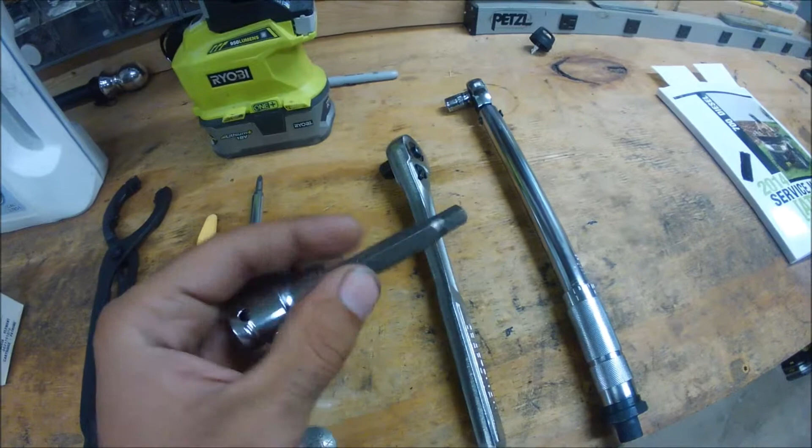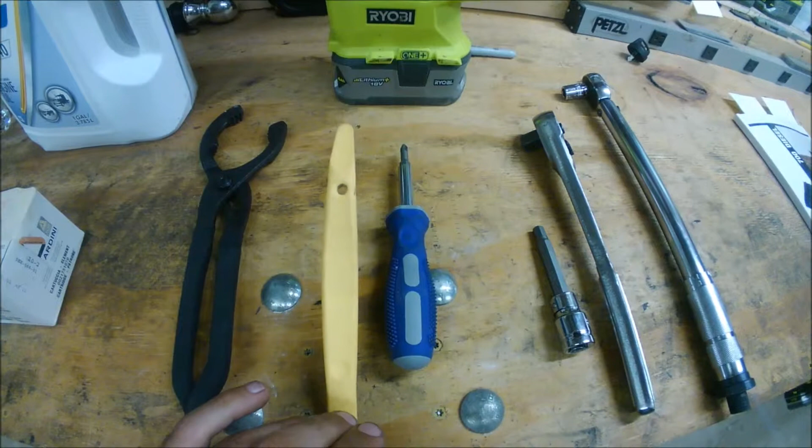Tools I got laid out: a socket, I'm going to be using 8mm, an Allen key - if you don't have the socket type, a regular one would be fine. That's going to be for the oil drain. I got this out because it gives an 18 foot-pounds torque spec for that plug. Just a screwdriver and a little prying piece for taking off the engine side panel, a filter wrench, and then my light if I need it.

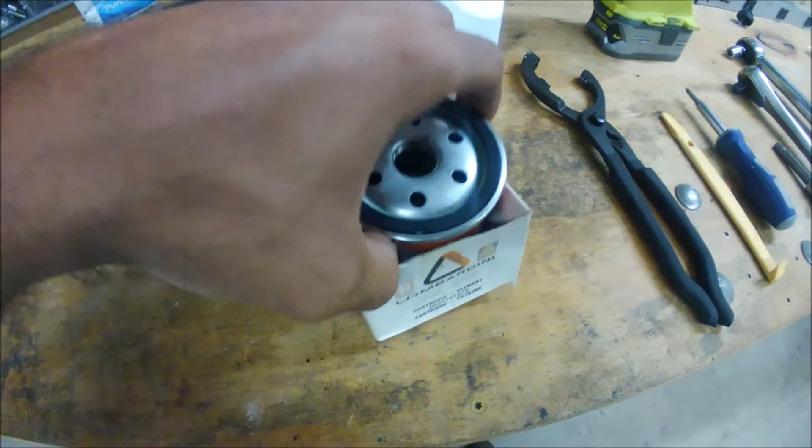Oil filter - this is the one that you'd get if you went to an Arctic Cat dealer. Lombardini part number 3206-194. I bought these as overstock from an Arctic Cat dealer that closed. I already took it out of the plastic - it comes with the plastic.

Gaskets on there, and I'm going to use Rotella 15 weight 40. The manual recommends a 10 weight 40, but I'm in South Texas, it's mostly warm, very warm, so I don't mind having a little bit heavier oil in there. Also, I buy this by the case - big cases for my tractor, my truck, now for the ATV, for my diesel generator, all that stuff. So keeping it simple. And water, so I could hydrate.

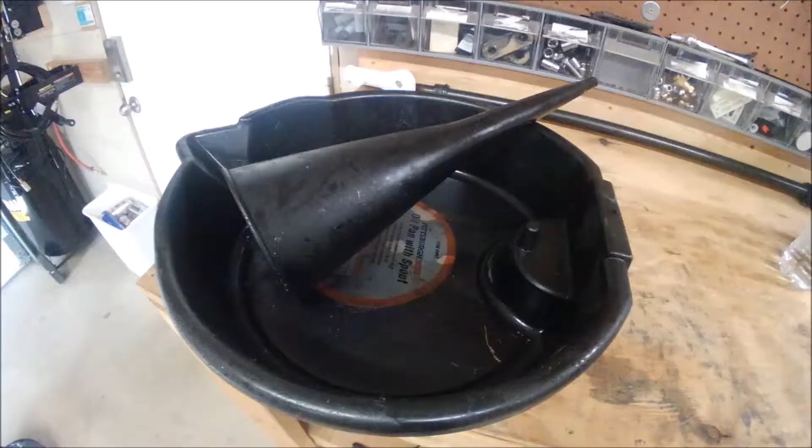Should go without saying, but you need a drain pan for your oil. And then I have this long funnel because, as you're about to see here in a little bit, the oil filler cap's kind of deep inside an access panel, so it'll help. Then I got a bunch of blue shop towels, paper towels, for cleaning up oil because you know it's going to spill.

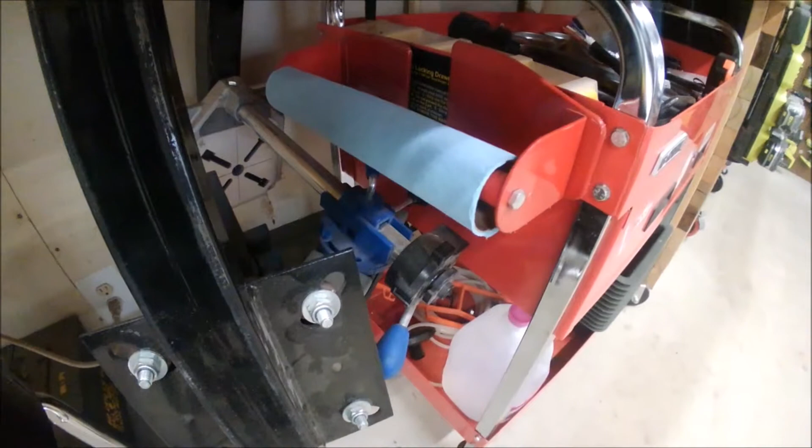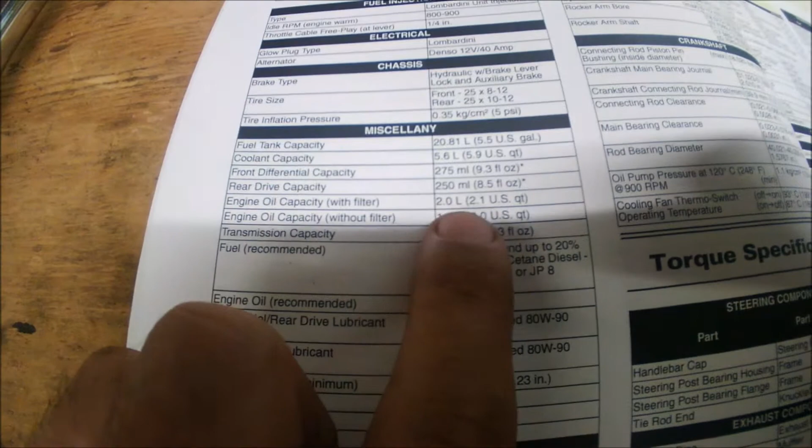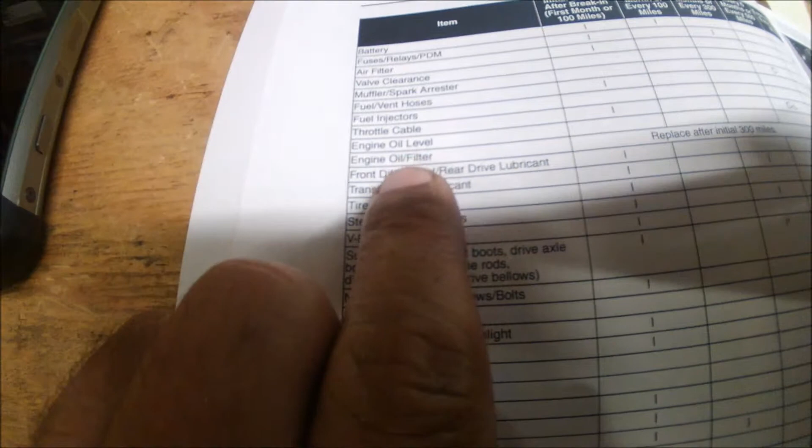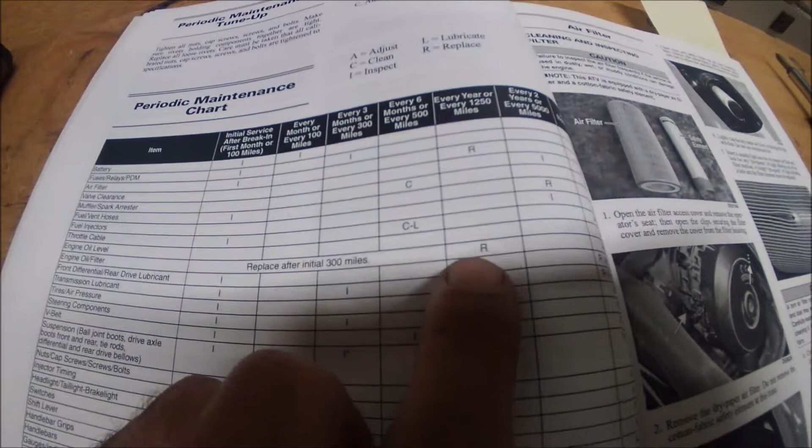Open up the service manual to page 2. Oil capacity with filter: 2.1 US quarts, or 2 liters. Recommended engine oil, like I said before, is a 10 weight 40. On page 6 of the manual is the periodic maintenance for your engine oil and filter. The initial 300 miles of the machine is like your break-in period, and then it's every year or 1,250 miles. Surprised they don't tell you about hours either, but I guess every year is fine.

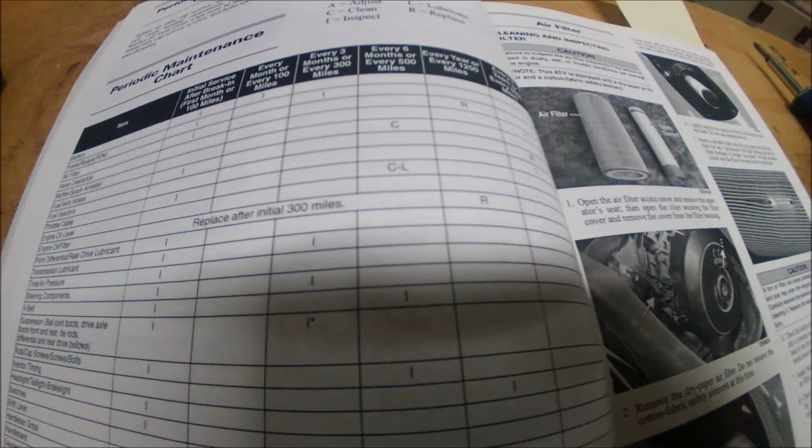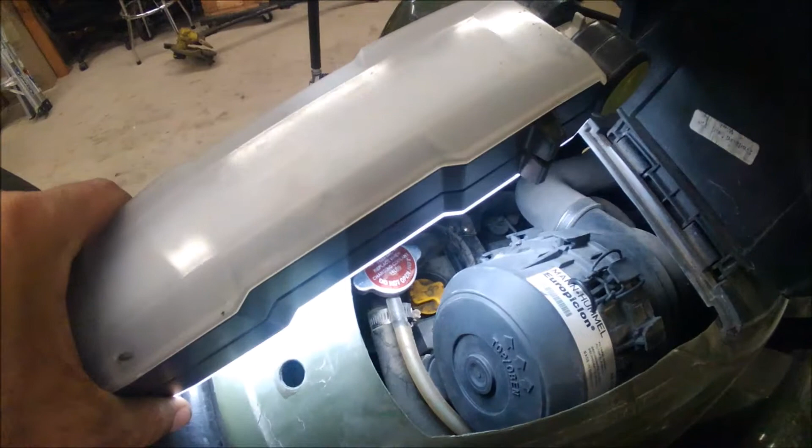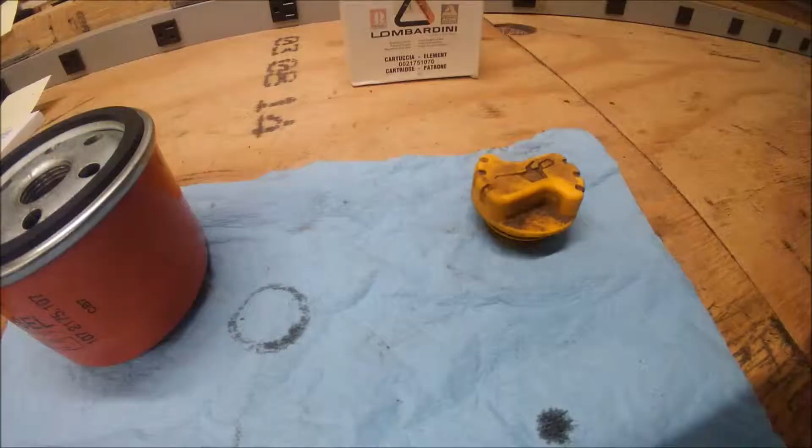First thing to do is open up the oil filler cap - it's the yellow one with the little oil symbol on it down there. Got the cap off. Should have mentioned earlier, but get it up to running temperature so the oil is thinned up a little bit and it'll drain out a little bit easier. I put the funnel in there just to remind me the cap's not on, and it's in place for when I need to put oil in.

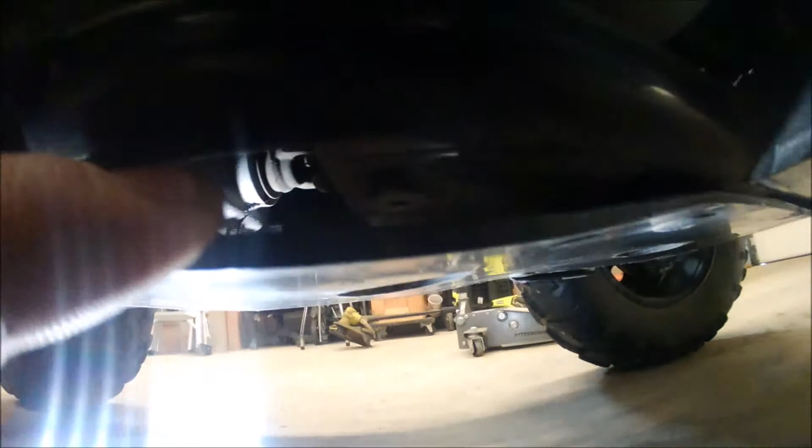Next to the oil drain plug, got my 8mm here on the ratchet. As you can see, I came on the right hand side of the machine. You look up and there's a little hole in the plastic here - you can see it, that's your oil drain. Alright, got my drain pan in place. If you're so inclined, use some gloves. I mean, I'm not wrenching every day, I don't really care about getting oil on myself.

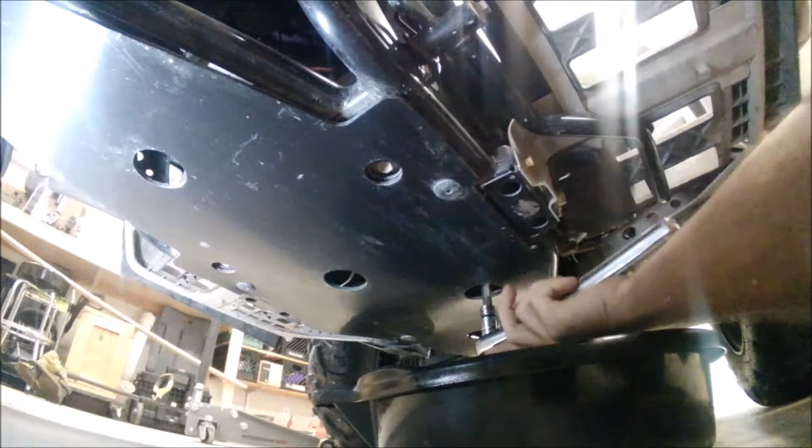Whew, it's still warm. She's draining out. Alright, that's going to keep dripping for a little while. As you can see on the drain plug, there's a little brass washer - don't lose it, don't damage it, or you'll have to get another one. That acts kind of as an extra gasket to prevent leaks and stuff.

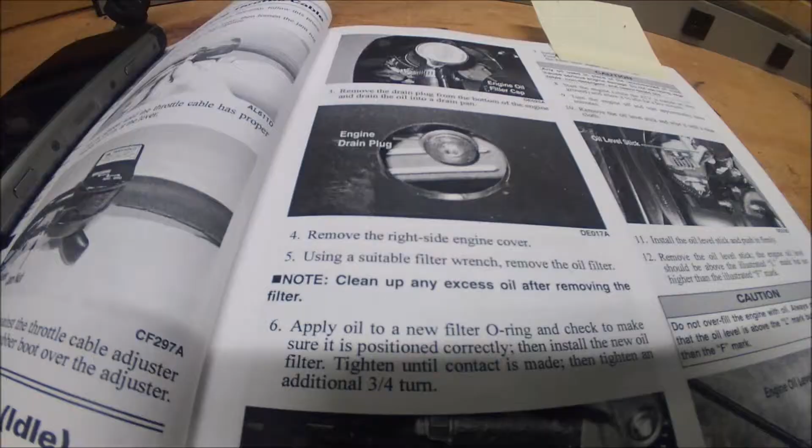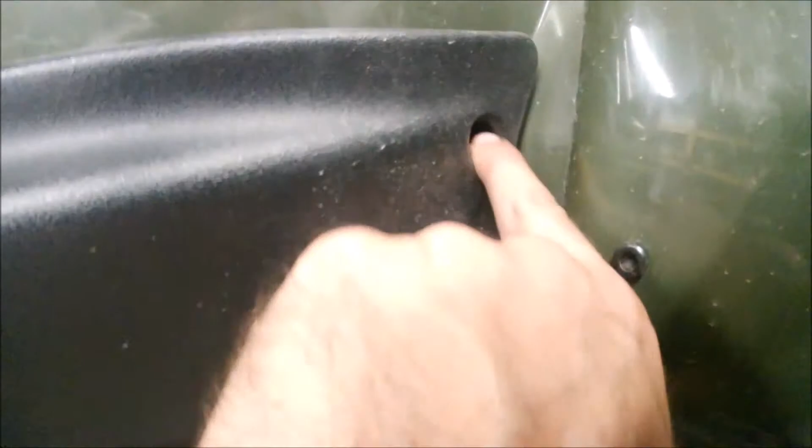To remove the right side engine cover - that's this cover right here. And it's got these weird, I can't even record them that well, but they're like weird body panel fasteners, like a Phillips screwdriver. And I'm gonna take the seat off.

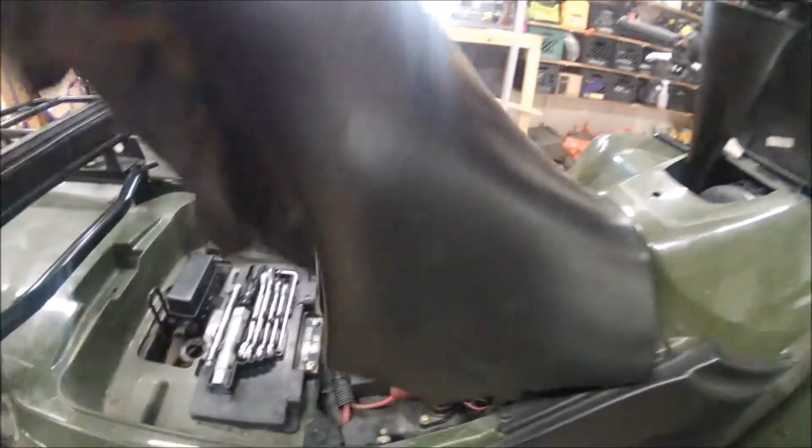Alright, these little things don't come off very easy. I've done this a few times before, putting in here. I don't know if I said you needed a screwdriver on my little tool list at the beginning, but I think it was laying in my line of tools. So if you end up damaging these, getting them out to the point where they can't really be used anymore, you can go to the auto parts store and find them in the help section.

Sometimes they won't thread out and you got to just sort of yank the panel off, like this one. Doesn't really seem like it wants to come out, so put the screwdriver and what came out down.

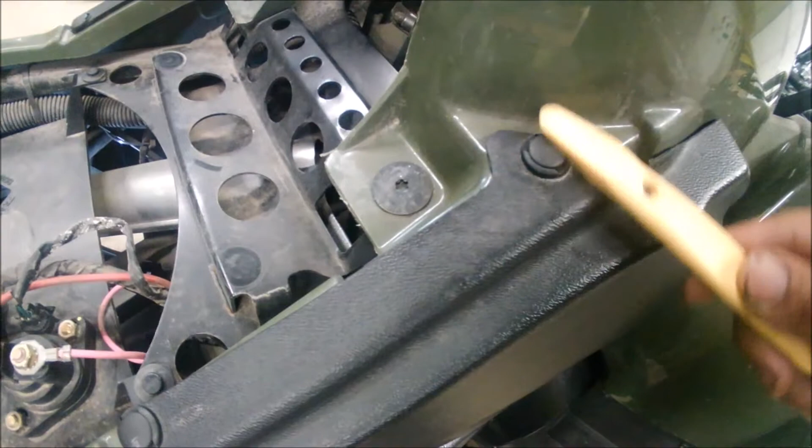Using a little pry tool. These are underneath too, little like pop rivets. Just get underneath and pull them out. Not supposed to come all the way out, but again, these are sort of like disposable things. So if you end up destroying them, go find an assortment of them at the auto parts store. I actually bought that one, came out pretty good. I bought a huge assortment of them for other stuff I do on my trucks and everything from eBay, where I find the piece here.

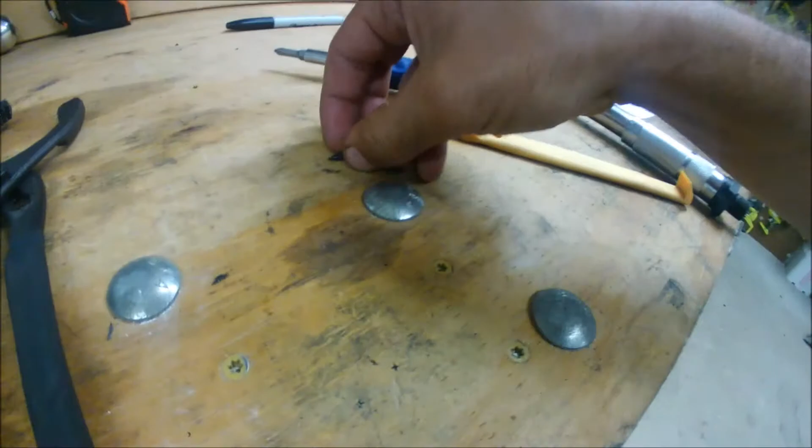Here's what I got out so far. See if I can do all this one-handed. See, that one was stubborn, didn't want to come out. Just yank it. The other one with the screw. Yeah, I'm just gonna put this over by the tire. Get the rest of my pieces here. And that white thing right there is your oil filter.

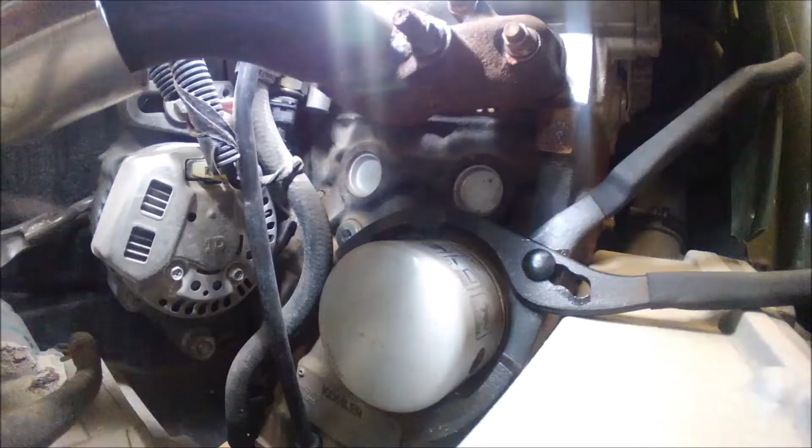All right, I don't have the best fit for the filter wrench, and I don't know how long this has been on here for, so I'm hoping it's not going to give me too much of a problem coming off, and kind of imagining this thing's going to make a god-awful mess, just going to drip all the way down. So I just moved the drain pan, and I'm going to hope for the best. Oh, it's moving. Cool.

Looks like there's a Wix filter, which O'Reilly's sells. Part number, I think, 557207. If you're smart, you'd find a way to cross-reference anyway. But there we go, a little more information.

Loose enough, get it off by hand here. Yeah, there goes the oil, dripping down.

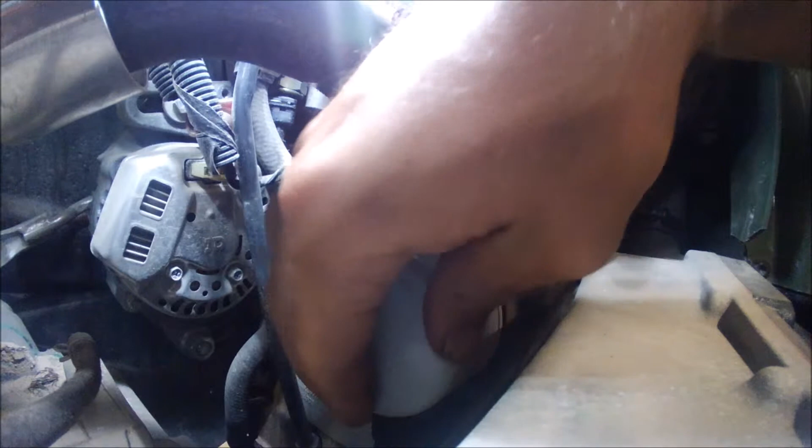Looks like most of the oil made its way down to the plastic skid pan, where at the beginning we showed the little access to the oil drain. So if your pan is still in that spot, it should catch most of it. Take my little shop towels, I'm gonna clean it up. Make sure the surface is in good shape. I'll do my best to clean up some of the oil, but it'll just burn off.

All right, I'm getting ready to put the new filter on. Normally when I do my truck and stuff, I'll fill the filter, but because this one's sideways, obviously all that's gonna pour out. So I opened up the oil here, and I'm going to put a good coat of it all the way around this gasket. I don't know how long it's been sitting on there. Hopefully it's good. All right.

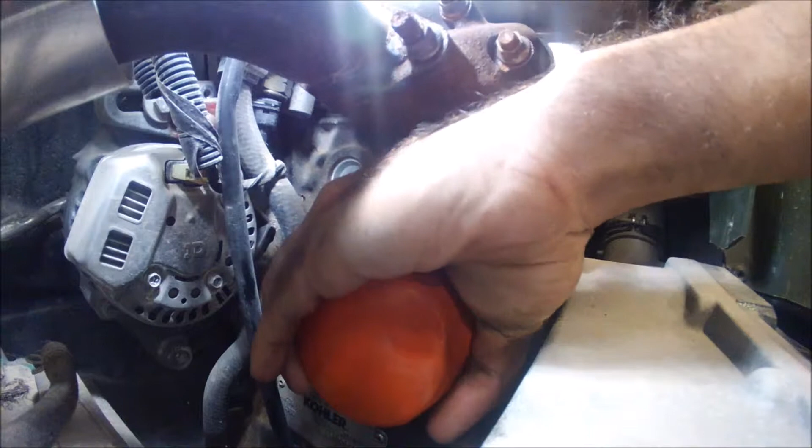All right, putting a new filter in. It says on the filter itself, hand tighten only, which is a little different than inside the book, which says until contact and then three-quarters of a turn. I don't know what the hell contact means, but I'll take this, and as tight as I can get it with my hands is where I'm going to leave it at.

All right, it's good to go.

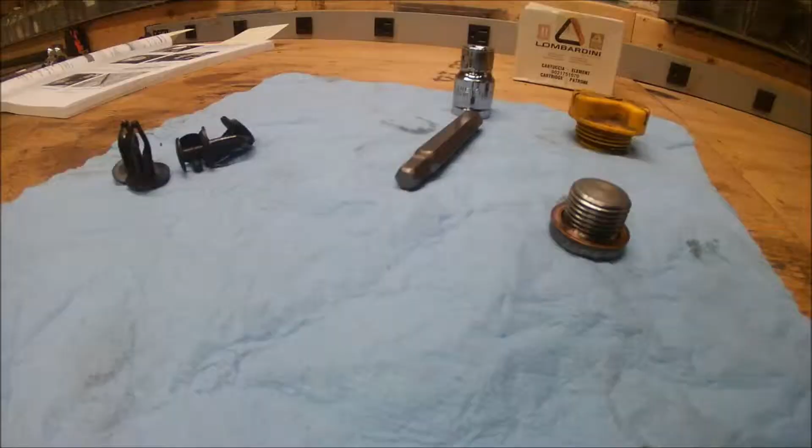Gotta put your drain plug back in now. I'm still gonna leave the drain pan there, even though it's a little bit in the way, just because all that oil that came down from the filter is still dripping. Kind of a pain in the ass, but I haven't found a vehicle yet where it's really good to go with when you take the filter off, not making a big old mess. But got my 8mm socket set back up and put it in there hand tight for now.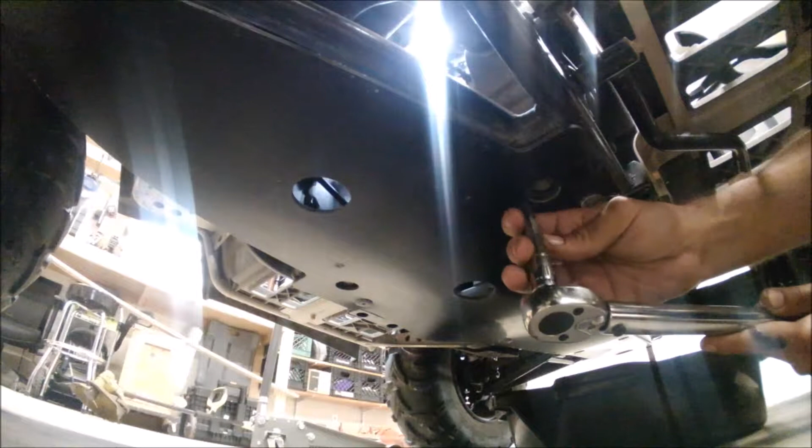18 inch-pounds, as you were, 18 foot-pounds. Got it tightened, and that is according to the manual.

Okay. Come on now, get that out of the way. Okay, cool. All right, I'm ready to put the oil back in.

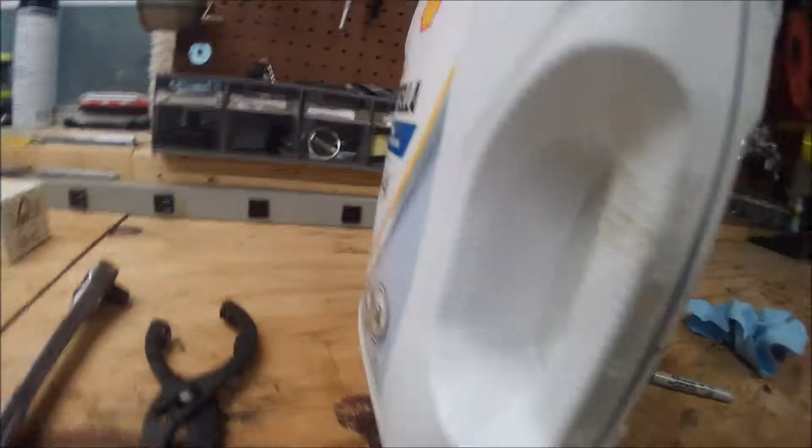It gave me over here. I marked it at 2 liters. So.

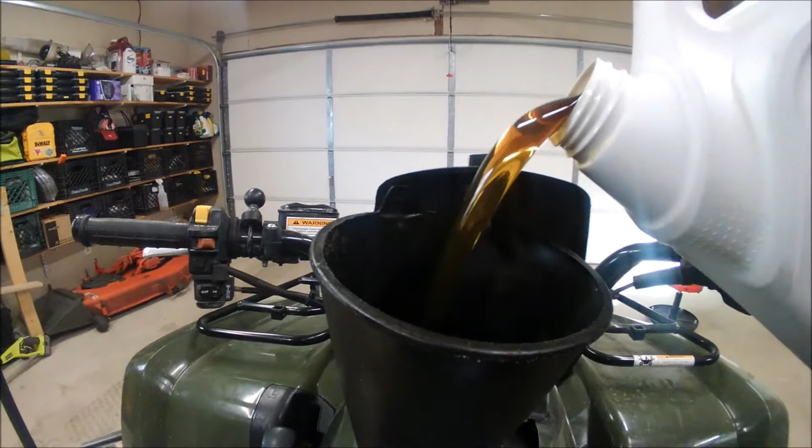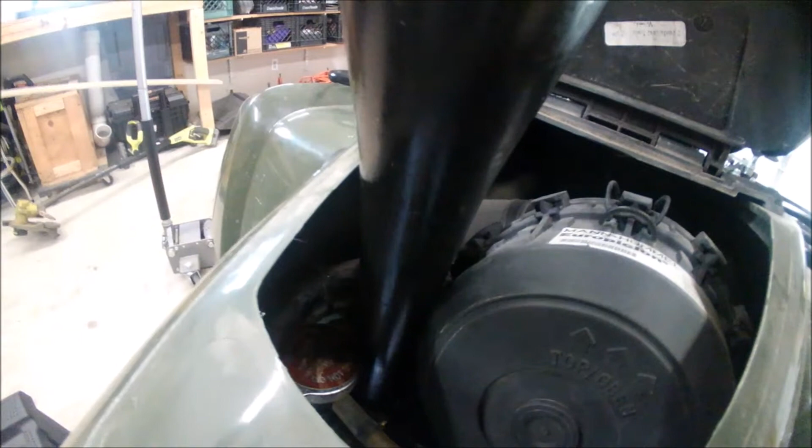Back on the table, see where we're at. Okay, a little bit more to go. You want to make sure you're not pouring it too fast in there, because just a little ways under where the filler cap is, sorry you can't see very well in there, the funnel isn't going very far, and this oil's thick and it's not warm, so I suppose it couldn't go down all the way and you end up spilling some of the oil out. So let's be conservative with that.

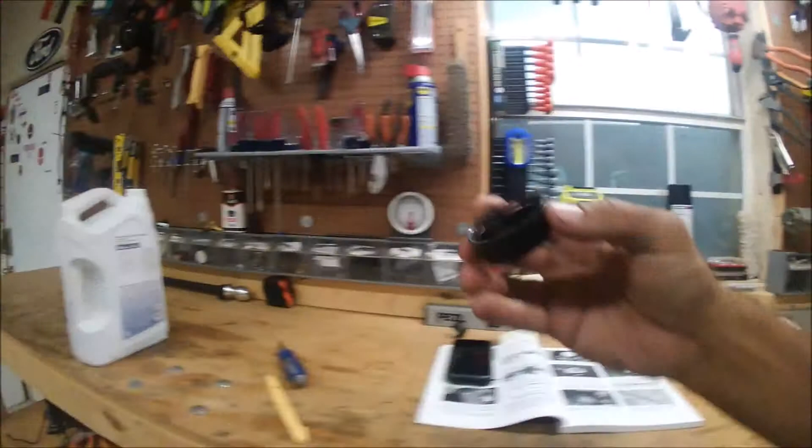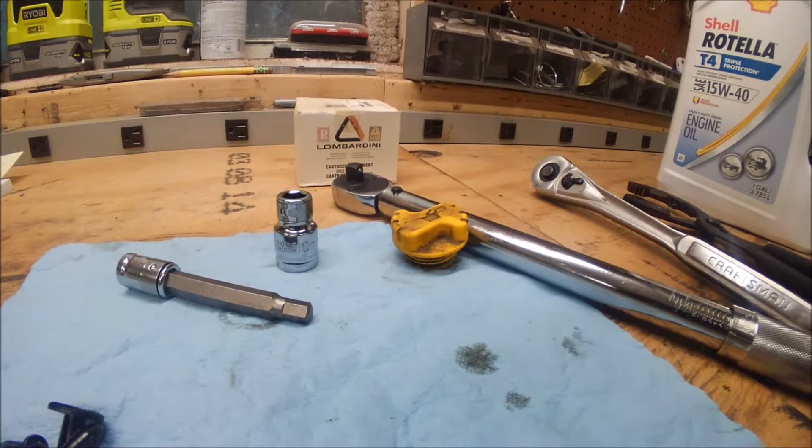All right, that's pretty darn close. Now I'm gonna put the filler cap back on, start her up.

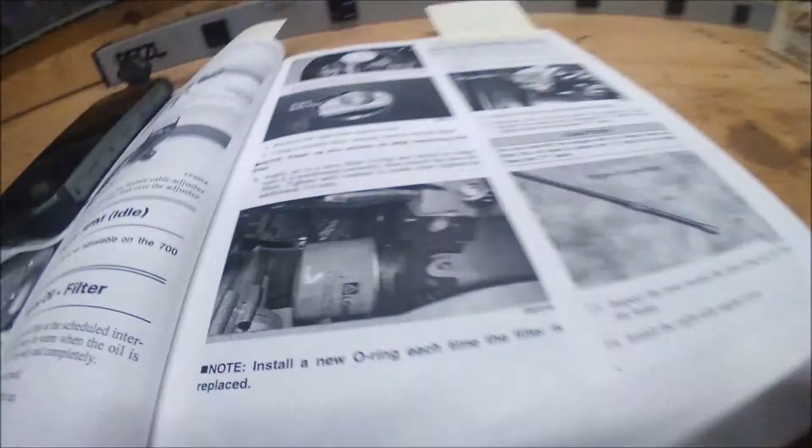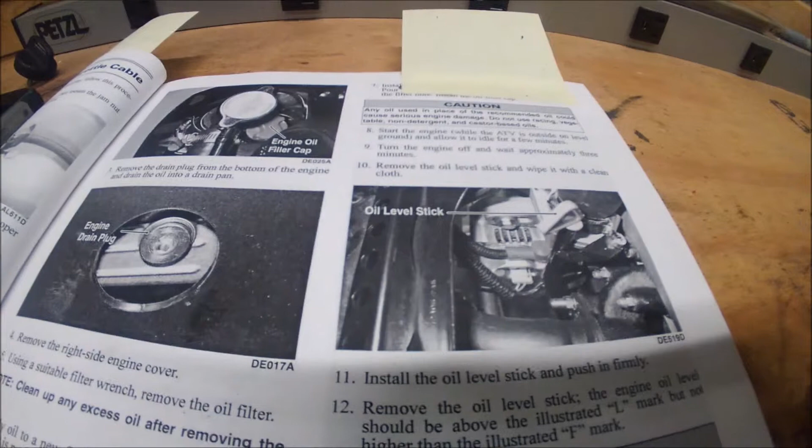And then now what we're gonna do, according to the book—I have been referencing this, I'm just telling you—right here we gotta turn the engine on and wait approximately 3 minutes. Basically you're bringing it up to temperature to get the oil and everything to move through, just like any other vehicle.

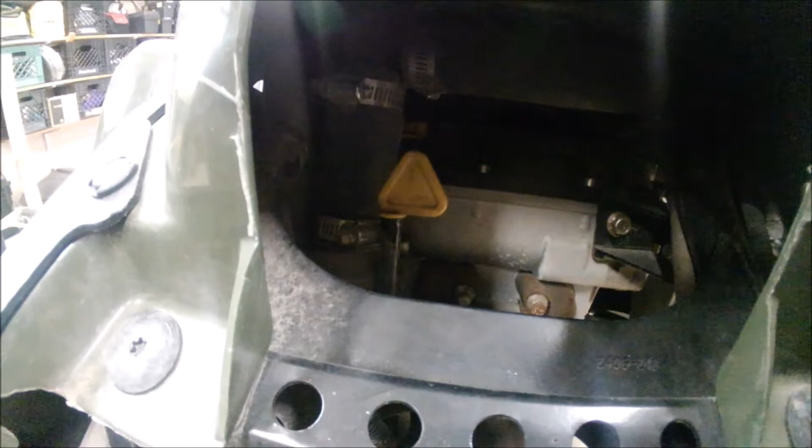When you take the seat off, that little yellow triangle, that's your oil dipstick. While that's doing its 3-minute idle, I'm gonna go take the old filter and throw it in my oily waste, and put it in my waste oil while that's done.

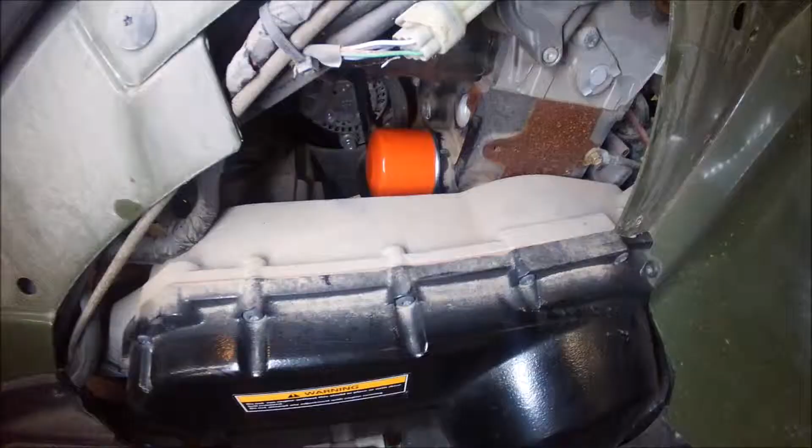3 minutes. First thing I'm gonna do, just after shutting it off, is just look quick for any leaks. It's gonna be a little hard to tell because it just dripped oil all over the pan, but as it's sitting here for a while, you want to look.

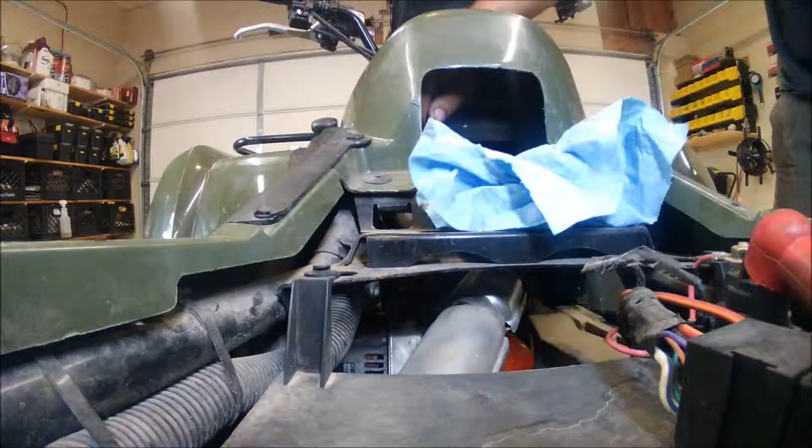All right, so your oil level—it's a little sticky. It's got 2 gaskets on it, so you gotta get it out. All right.

And I'm gonna wipe it off first. Actually looks like it might be a little bit low, I didn't put quite enough in. Make sure it was all the way in there.

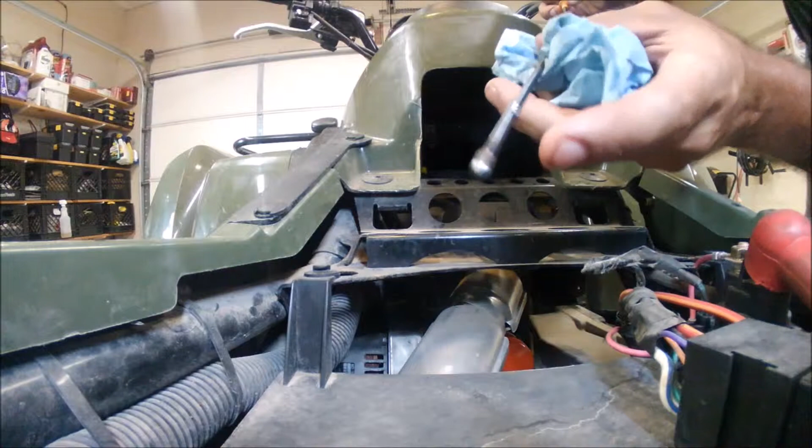I waited like 2 or 3 minutes for the oil to settle out. So it's hard to tell, but it's like a third of the way up. I could probably put a little more oil in, but the instructions say if it's between these 2 tick marks you're good to go. I like to be topped off, so I'm gonna add a little more oil just to make myself feel better.

Okay, yeah see, I added just a little bit, and it's right in the middle. So I'm just gonna do a dab more and call it good.

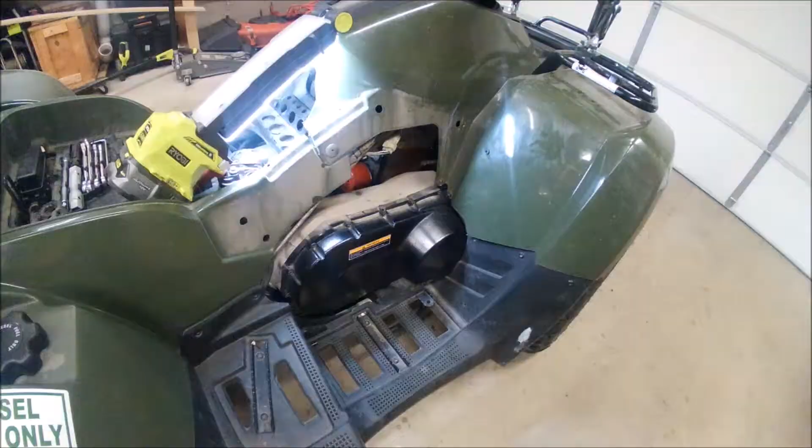All right, finished topping the oil off, and realized I forgot—I always write the year and month, the hours, and the miles when I change the filter. I also usually write it on a piece of tape and stick it somewhere on the machine that I could reference, because it's easy to forget and I like to keep track of my maintenance.

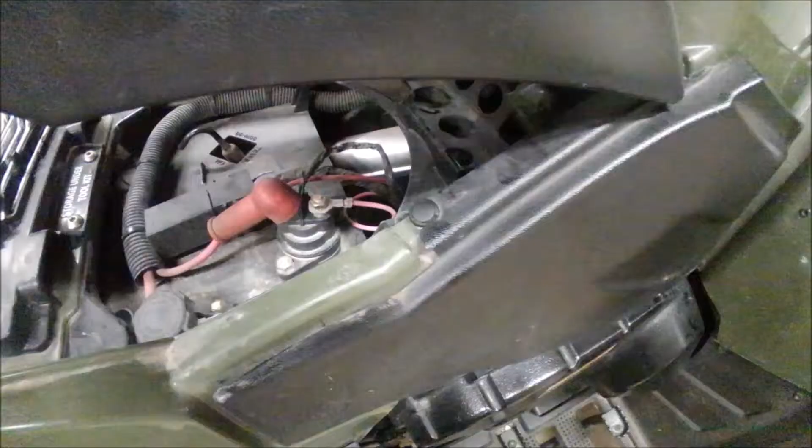All right, just finished up. When you're putting these back in, if you had to go get new ones or whatever, they're pretty self-explanatory. Put them in the hole so it lines up, and then you just push the head of the pin down.

And then the screw one, same idea, but instead of pushing the pin, you put the screw in. If all you got is push pin ones, I'm sure they'll work on here too, but those tend to break if you don't have an easy way to get at them. They make all kinds of special tools, but it is what it is on these.

Put your seat back on, make sure this is covered up, and yeah, ready to rip. Talked earlier about how I like to take a little piece of tape and write when I did my last service for all my machines. This little spot right underneath the seat where the owner's manual is—that's where I'm gonna write something when I do my transmission and stuff like that. I'll add the services here.

All right, make sure the oil and everything's topped off one more time. I'm gonna go run her up and down and put a few miles on going up and down the county roads, then come back and check for leaks, stuff like that, make sure she gets hot.

But yeah, changing the oil on this thing is very, very simple. I expected it to be harder considering it's a Kohler motor that they made fit inside the machine, but they did a good job. Shit, if I wasn't recording this video, it probably would have taken me 15 minutes to do this.